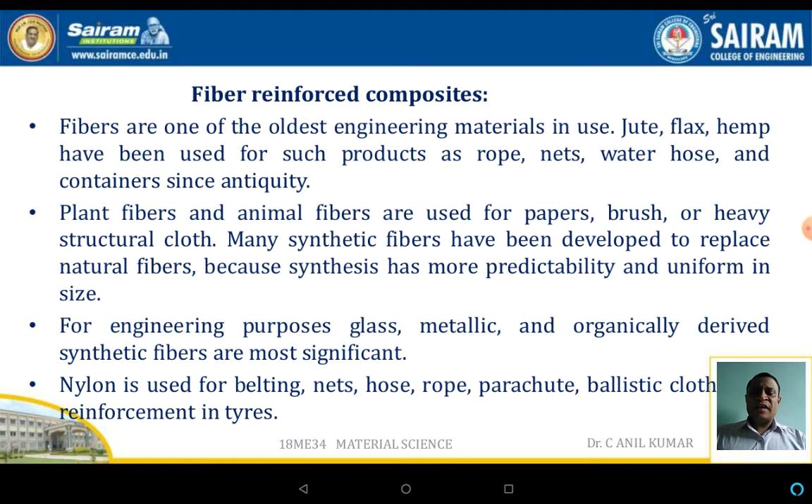Glass fibers have high strength, low stiffness, high density, and low cost. Graphite fibers have high strength, low cost, and are less dense than glass. Boron fibers have high strength and stiffness with high density. Aramid has the highest strength to weight ratio of all the fibers.

Other high cost fibers such as nylon, silicon carbide, silicon nitride, aluminum oxide, boron carbide, boron nitride, and tantalum carbide are some of the fibers with major industrial applications.

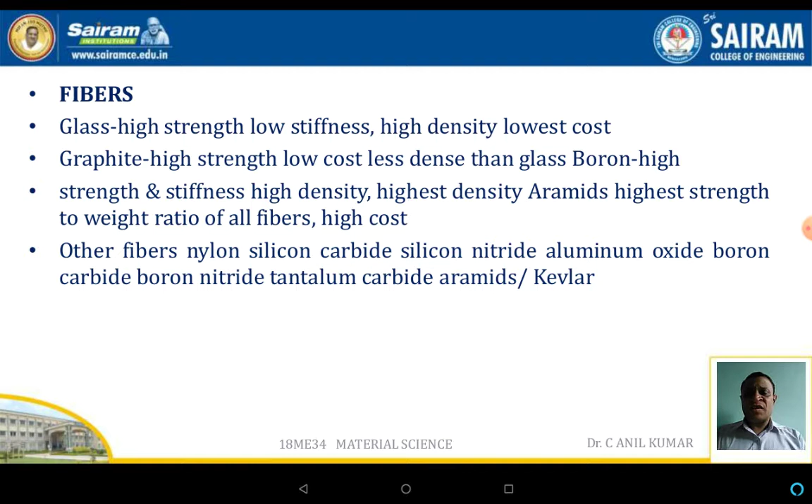Now, the role of the matrix in the composite material. The choice of the matrix is a major factor in engineering materials, whether in the case of MMCs, PMCs, or CMCs, and it makes the engineering application desirable.

In the case of MMCs, the alloying matrix material plays a major role. One particular point of importance is whether the composite is to be continuously or discontinuously reinforced.

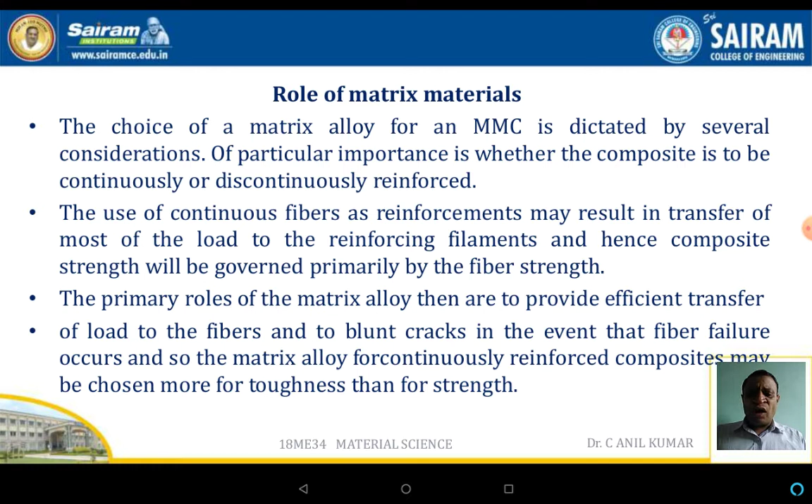The use of continuous fiber reinforcement may result in transfer of most of the load to the reinforcement filament, so the composite strength is governed primarily by the fiber strength. The primary role of the matrix alloy is to provide efficient transfer of load to the fiber and to avoid crack propagation in the composite.

The basic application of the matrix is to lower the strength while providing a more ductile and tougher matrix alloy, which may be utilized in continuously reinforced composites.

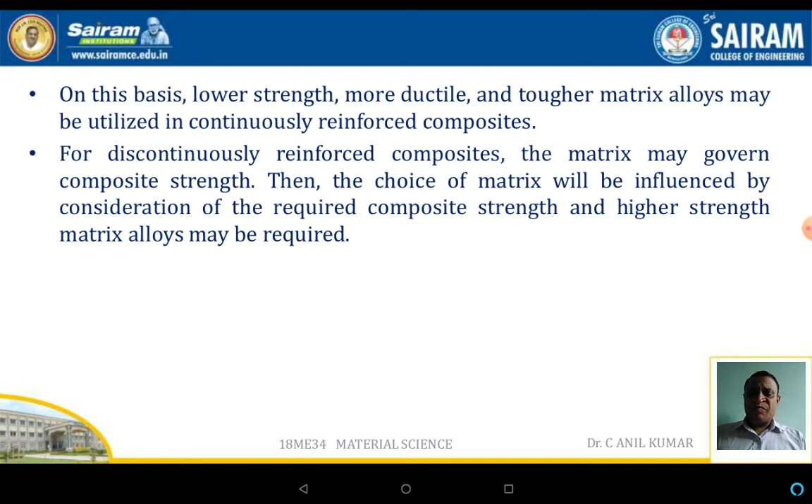For discontinuously reinforced composites, the matrix may govern the composite strength, so the choice of matrix is influenced by the required composite strength, and the higher strength matrix alloys may be needed. Depending on the type of application, the matrix will also vary.

Now, in this slide, we will discuss the functions of the matrix. In a composite material, the matrix material serves several functions. The first major function is holding the fibers together, forming a composite material, and it also protects the fiber from environmental wear and tear and abrasions.

Distribution of the load evenly between the fibers is another major function of the matrix, which is also subjected to the same amount of strain as that of the fiber material, enhancing the transverse properties of the laminate.

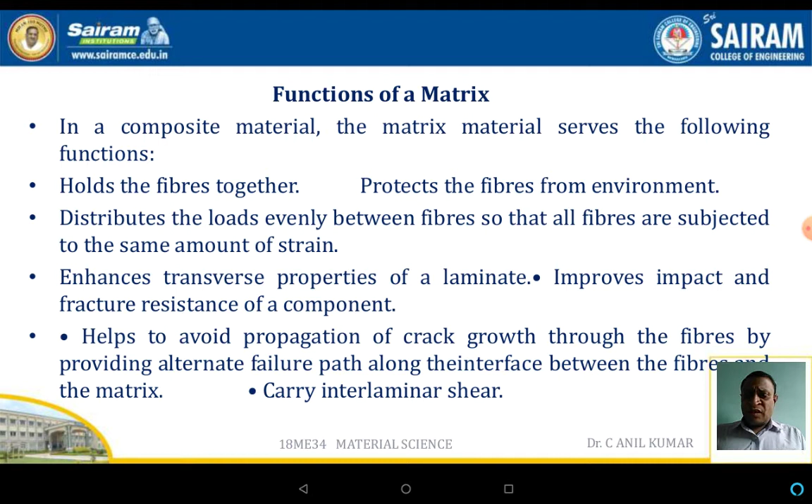It improves the impact and fracture resistance of the component. The matrix also helps to control the propagation of crack growth through the fiber by providing an alternate failure path along the interface between the fiber and the matrix material. The matrix also carries the interlaminar shear.

The desired properties of the matrix: the need and desired properties of the matrix are most important for a composite structure. The main important properties are reduced moisture absorption, low shrinkage, and low coefficient of thermal expansion.

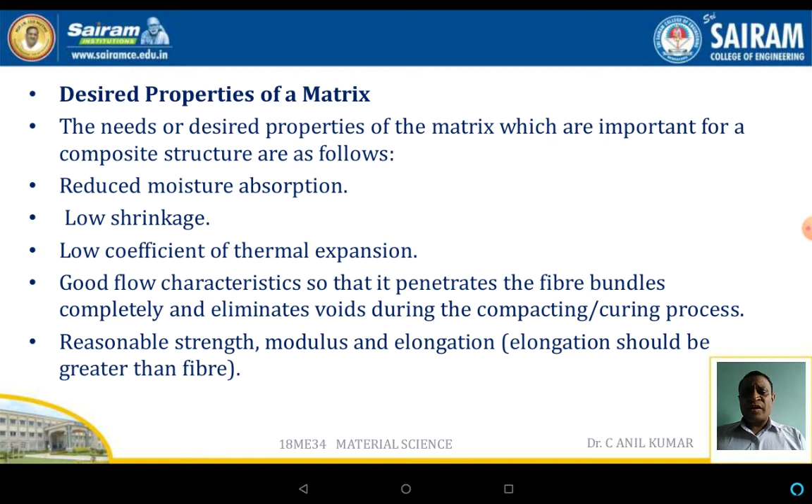Good flow characteristics are needed so that it can penetrate the fiber bundles completely and eliminate voids during the compacting or curing process. Reasonable strength, modulus and elongation are also major desirable properties of the matrix.

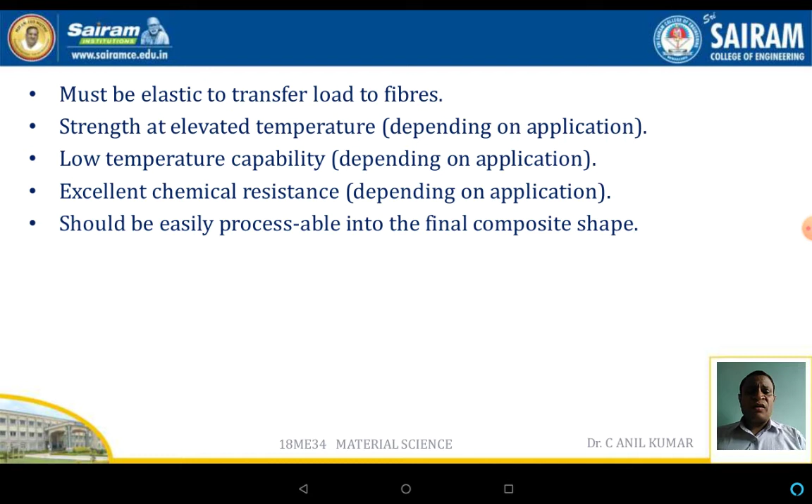The matrix must be elastic, and it also transfers the load to the fiber. Strength at elevated temperature is also most important. Low temperature capability, excellent chemical resistance, and it should be easily processable into a final composite or compact shape.

The factors to be considered in the selection of the matrix material: the matrix must have mechanical strength compatible with that of the reinforcement, either in taking the load or in distributing the load evenly to the reinforcement.

Thus, if a high strength fiber is used as reinforcement, there is no point using a low strength matrix which will not transmit the stress effectively or efficiently to the reinforcement.

The matrix must stand up to the service conditions, such as temperature or humidity, exposure to ultraviolet rays, exposure to chemical atmosphere, and abrasion, even from dust particles where abrasion is maximum.

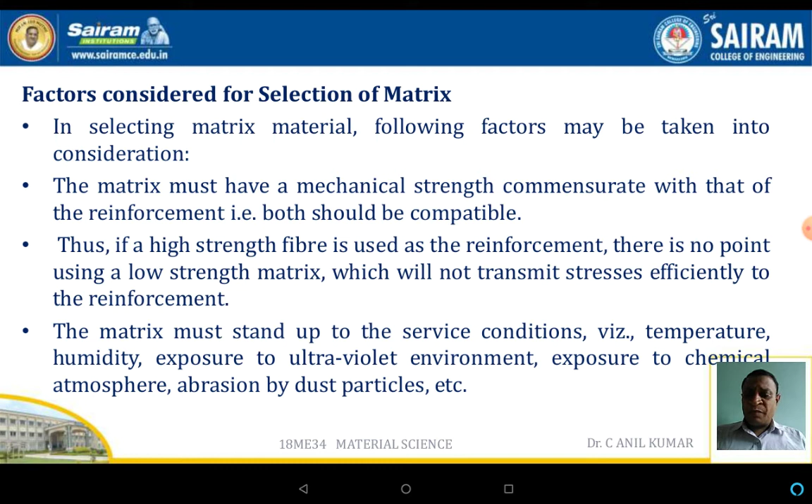The matrix must be easy to use in the selected fabrication process. The life expectancy is another major factor in matrix selection.

The advantages of the composite: the advantages exhibited by composite materials, which are significant for application in the aerospace industries, are as follows: high resistance to fatigue and corrosion degradation, and high strength or stiffness to weight ratio as enumerated above.

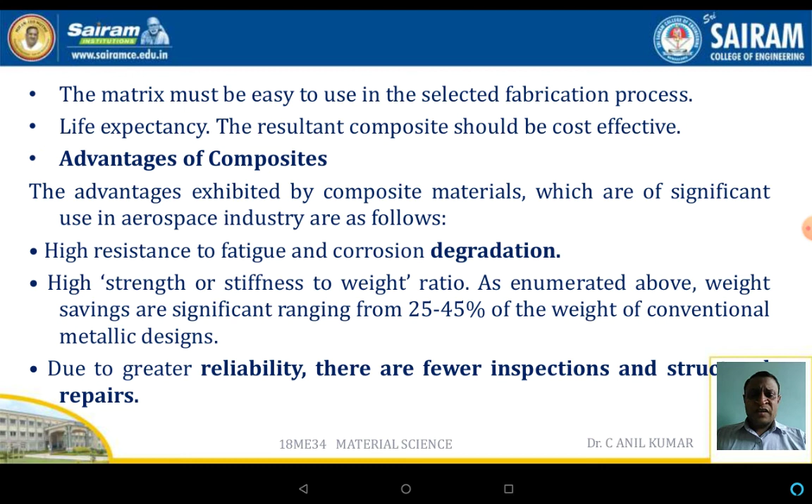There is weight saving which is significantly 25 to 45% in weight compared to conventional metallic design. Due to greater reliability, there are fewer inspections and structural repairs essential in composite applications, and there is directional tailoring capability to meet the design requirement.

The fiber pattern can be laid in a manner that tailors the structure to efficiently sustain the applied load. The fiber-to-fiber redundant load path can also be very easily manipulated in the composite.

Improved dent resistance can normally be achieved very easily in composite material. The composite panels do not sustain damage as easily as thin normal gauge sheet metals, where denting is predominant because of impact.

It is easier to achieve a smooth aerodynamic profile for drag reduction. The composites offer improved torsional stiffness. This implies higher whirling speeds and a reduced number of intermediate bearings and supports of the structural elements.

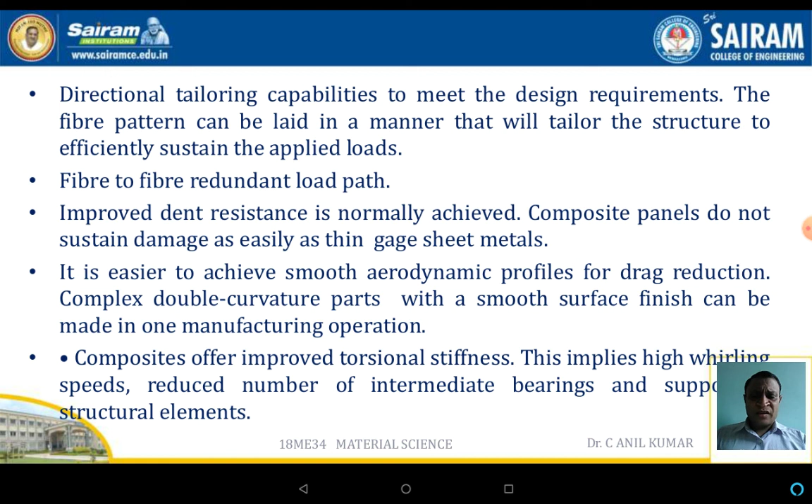The overall part count, manufacturing and assembly costs can be reduced very predominantly by using composite material. High resistance to impact damage can also be achieved.

Thermoplastics have a rapid process cycle, making them attractive for high volume commercial applications that have traditionally been dominated by sheet metal. Moreover, thermoplastics can also be reformed. Like metals, thermoplastics have an indefinite shelf life.

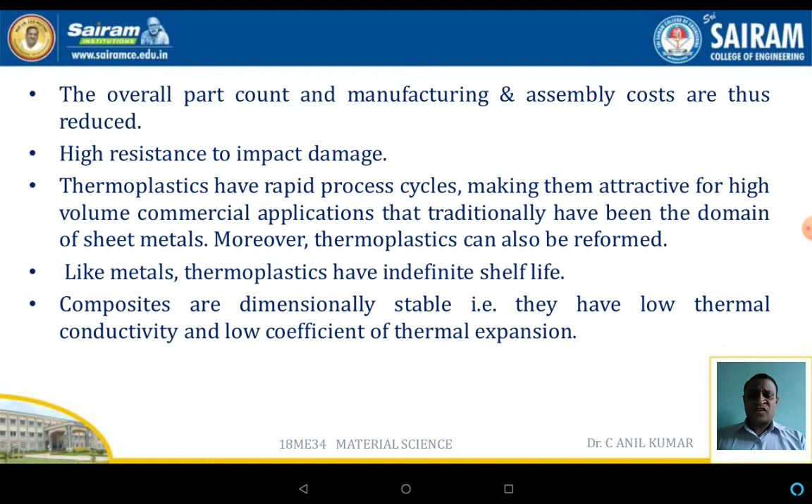The composites are dimensionally stable, and they also have low thermal conductivity and a lower coefficient of thermal expansion than conventional materials.